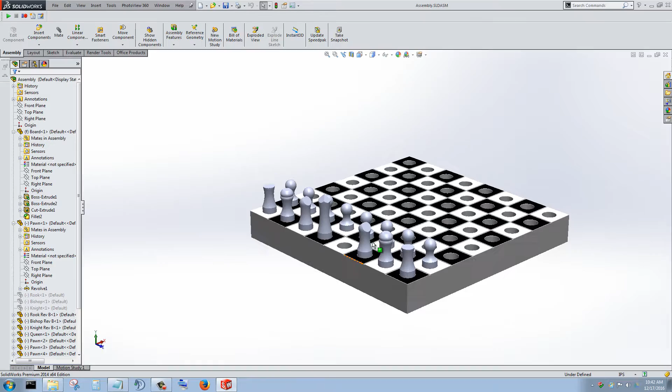Okay, I think the last thing that we need to build is the king. I just pulled up the assembly, and the assembly's nice. For instance, I can right click on any one of these parts and say open part, so assembly can be a really nice launch pad.

Okay, so if we look at this queen, we'll do file save as a copy and open, and we'll save this as the king.

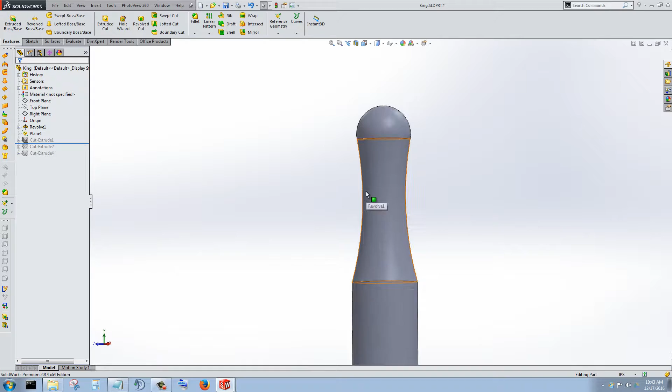Let's roll up to a point where we think - I'm just going to roll that back, and roll it back again. We could make this the starting point right here for the king, and I think we will. We'll make the king a little more staunch, so we'll edit our original sketch and adjust this arc.

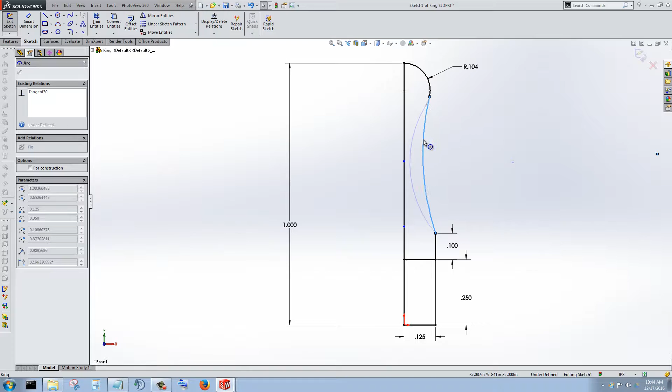And well, first - there we go. Okay, I see, there we go. Alright, that's fine.

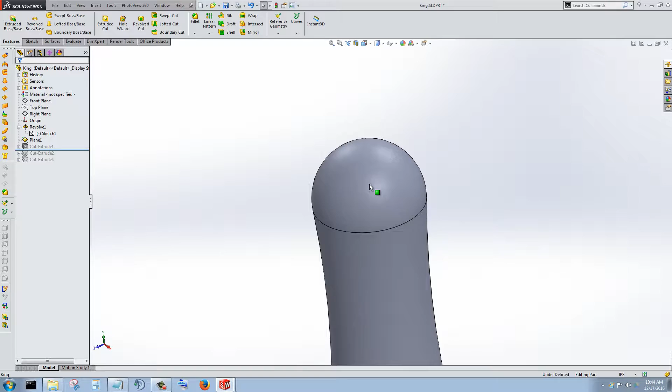Now, for the king, I'm going to do an extrude down. I'm not going to have a complicated cross, but I'll have a simplified representation of that cross. What I want to do is get a reference plane that is parallel to the top plane, so parallel to this circle right here, and tangent to the top of his head.

So a couple ways I can do that. First of all, reference geometry plane, and then your reference points. My first reference, I could select that circle right there.

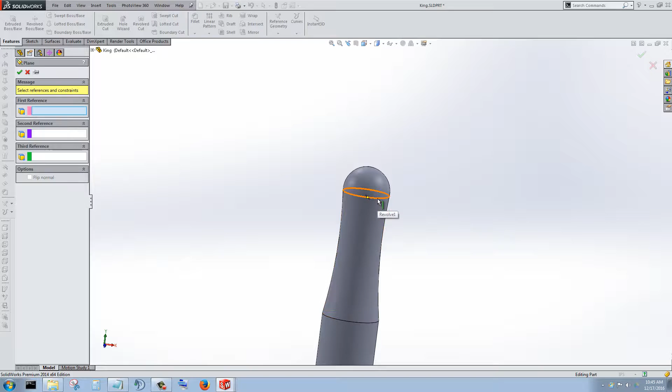Oh, hold on, I got a phone call. Wait. And okay, we're good. Alright.

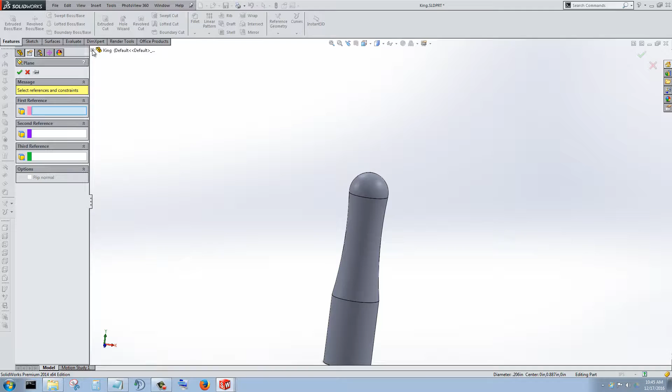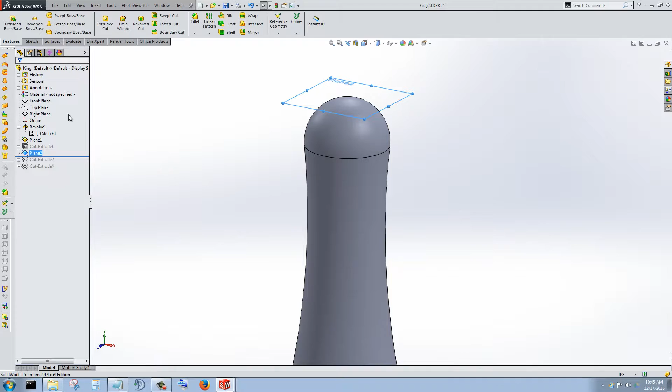Or I could just delete that, and we can also go parallel to the top plane. By default, it sets it up here at a given distance, but we can just go over to parallel and take care of that. So now it's somewhere and it's parallel to the top plane. Okay, there we go, tangent to that sphere. Check mark, OK. Let's go normal to that plane, and let's begin a sketch.

Now I'm going to carve out everything except for a square around the origin, around the very center of the sphere, or what is to be the crown. So just - there's a hundred ways to do that. Remember, back to your geometry, so I could start with a circle if I wanted to.

Oh, that's not what I wanted to do, not half an inch - there we go, 50 thou. And then I could start bringing out, go back to the line tool, not the square tool. I could start bringing out lines, enter, enter, enter.

There we go. If I hover up on that quadrant point, then it registers, and then just trim. That might be an interesting shape if I actually left it as a sphere and brought down. We can always come back and do that. For now, I have the square - that was my original intent. Let's just see what it looks like.

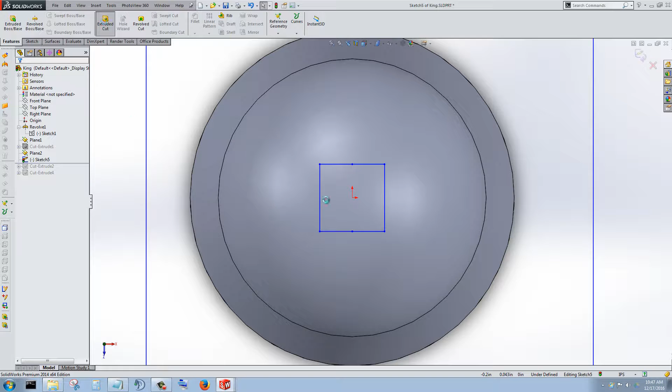So, extruded cut. Select your contours - it's going to be that contour. And our depth will go blind, although that is too far. Let's go half of that. Let's just see what it looks like. There you go, sort of kingish.

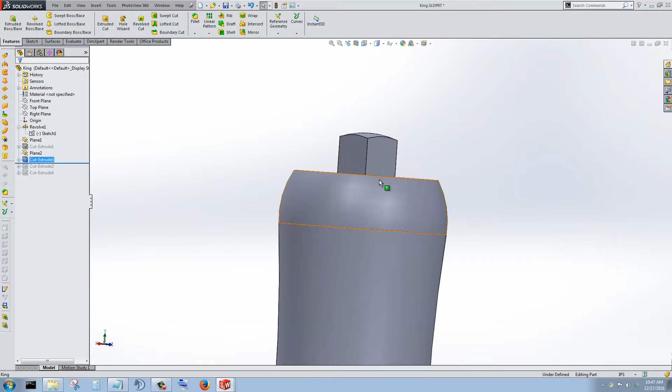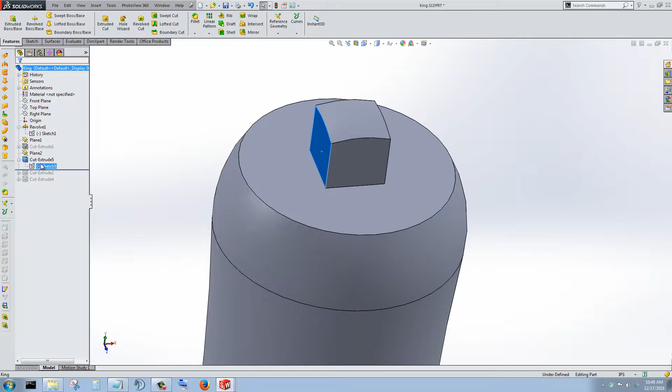Not really sure I like that. Perhaps make the square that sits on top bigger, or in fact make it more of a cross. So let's go back into the sketch. Now, to make this as a cross, I can do a couple things. Let's do this though - well, undo.

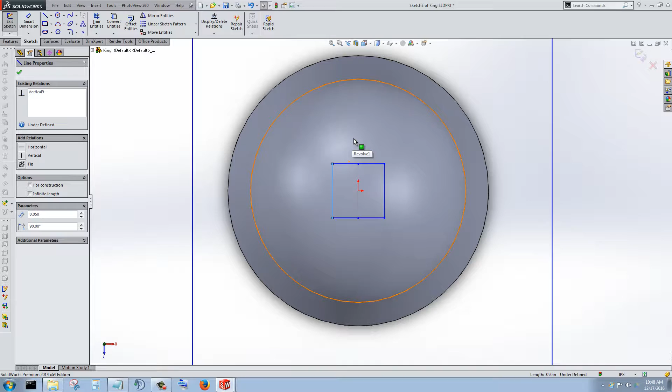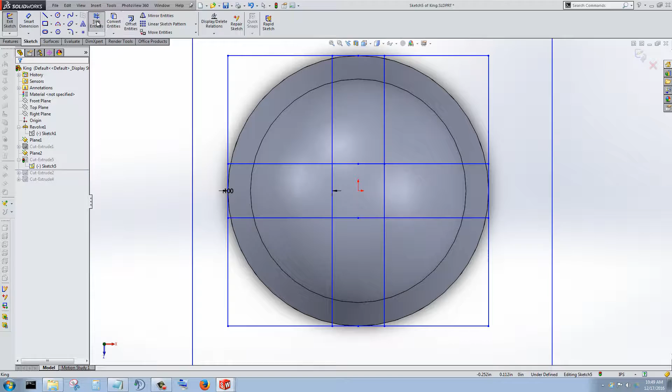Let's offset the square, check mark, and then extend the lines - that'll be the easiest thing to do. And now, trim away. Okay.

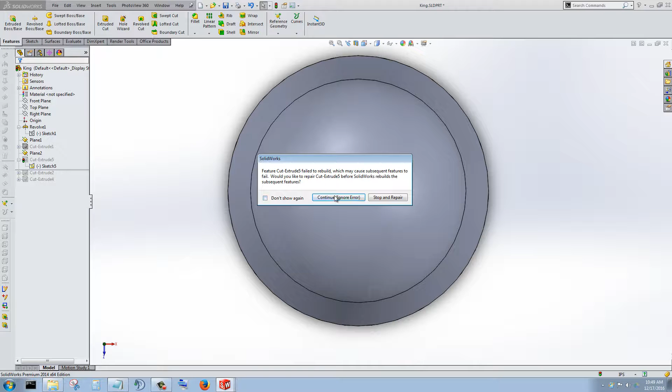Now this is going to be interesting. So I edited the sketch, and the selected contours are out of whack for the extrude cut. So it says feature cut extrude 5 failed to rebuild, which may cause subsequent features to fail. Would you like to repair cut extrude 5 before SolidWorks rebuilds the subsequent features? And I always just continue, because then it gives me an error: the intended cut does not intersect the model. Okay, oh gee, where's my cut? And it highlights in red over here with an X, and over here, and everything is red.

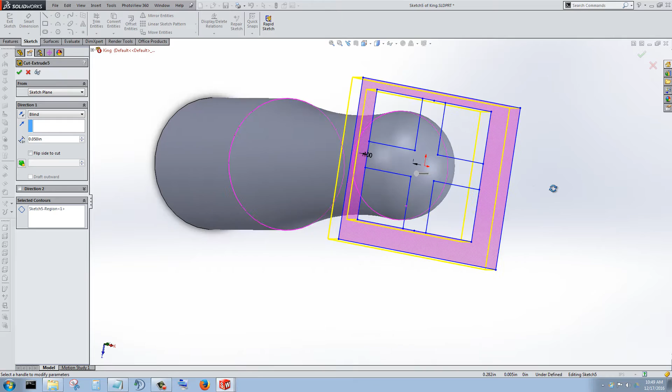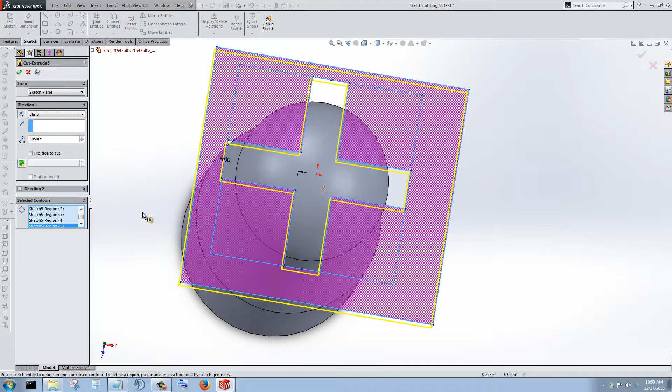That's fine, I'll just go back in and edit the feature. So what it's saying is it moved the region that I had selected - it got extended, and so right now it's not actually cutting anything, which created an error for SolidWorks. So let's just go back into the region editor, the selected contours. Now we have some geometry that will actually cut things, and hit OK. Hey, look at that.

Let's pull this into the assembly and see if that looks like a king. Sure does to me, I like that effect.

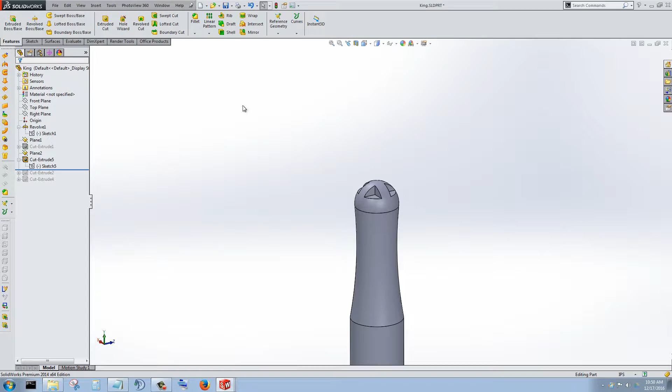Okay, save. Control tab, control tab again. Insert components - king. Mate.

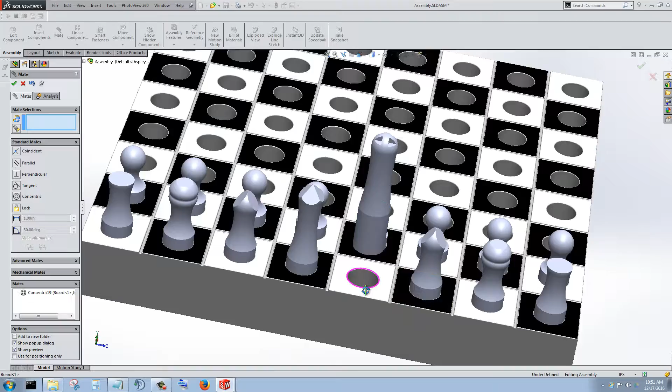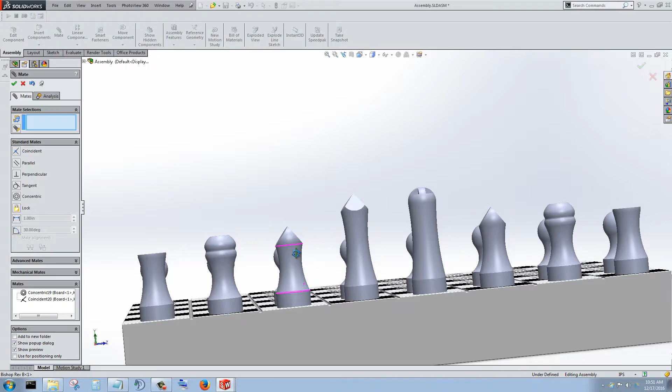Not bad, and it puts the king and queen at equal height. Survey this - the bishop could stand to be a little taller. Perhaps the top coming up to... yeah, not bad.

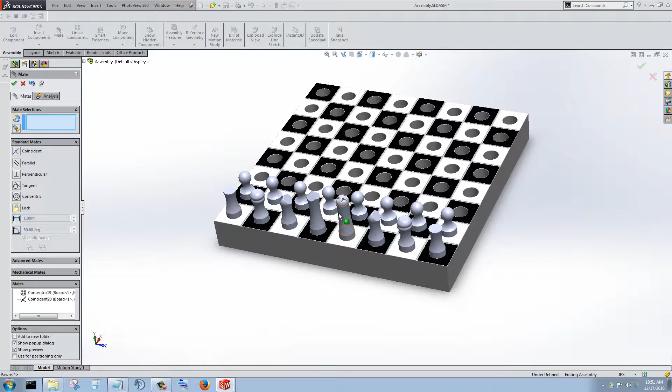Okay, let's fill out this board. Let's give all these pieces a color coding. There's a couple things we can do - we can define the color or how these pieces will look in the assembly or in the parts themselves.

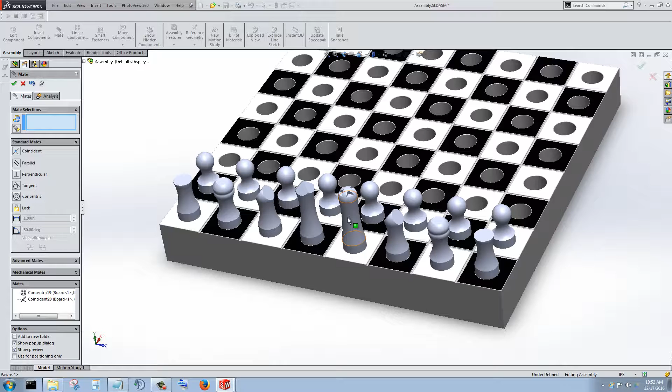In the long run, it'll behoove us to define the texture or appearance of these parts in the part files, but we're going to do it both ways. Here's how we'll do it in the assembly, and this is really simple - click on Edit Appearance.

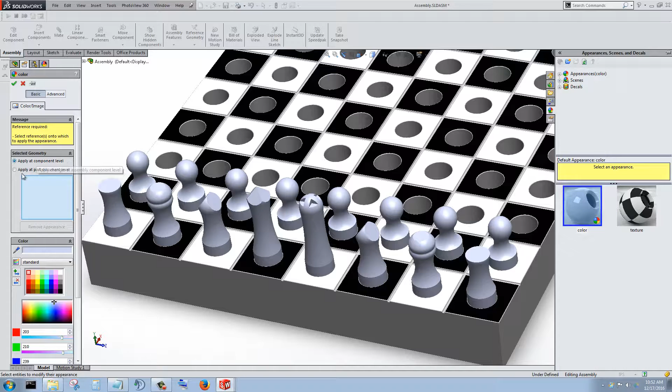Apply it at the component level or apply at the part document level. I'm not going to apply it at the part document level, because when we do that, we're going to do configurations of parts. So for now, I'm going to apply at the component level, which is the component of the assembly. And I'm not holding down shift, I'm just clicking all of these pieces.

Over here what closed was the Appearance, Scenes, and Decals tab, so I'll open that back up. SolidWorks by default has plenty of appearances that imitate different materials, different wood.

There's wood, there's plastics, a lot of plastics with different finishes, different metals, rubber, glass, then basically your basic colors as well. So I can go just white, black. Really the other thing to do is actually define the material at the part document level - if it's plastic, I really should edit the base material, and then the appearance will be inherent.

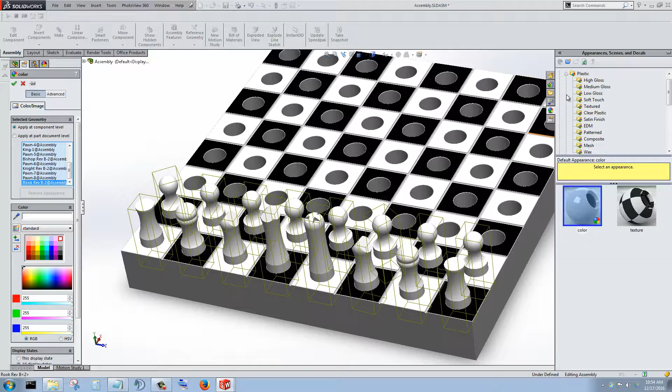For now, let's look at what a white low gloss plastic looks like, and then we'll hit OK. And you can go up to here and you can go to... oh, I have RealView Graphics on. It's going to turn on RealView Graphics, but it looks like we're okay.

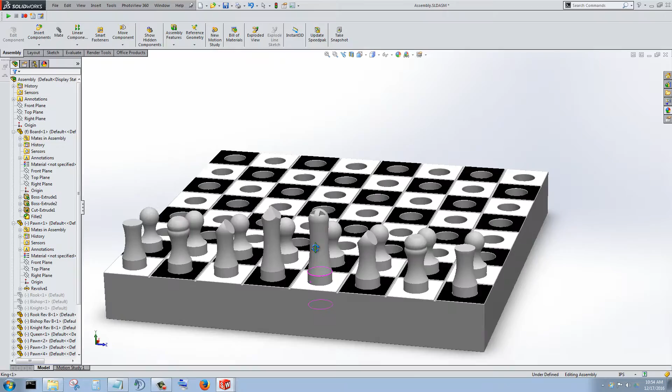What we're going to do here is just do a render, sort of a screenshot, so we'll go into our options for PhotoView 360. This is only going to be available in the professional seat of SolidWorks, not the standard seat.

Your output image size, do you want to output ambient occlusion, your final render quality, bloom, different shadow effects, direct caustics, and if you want to set up a network rendering. I've never been able to play around with that - I couldn't tell you much about network rendering.

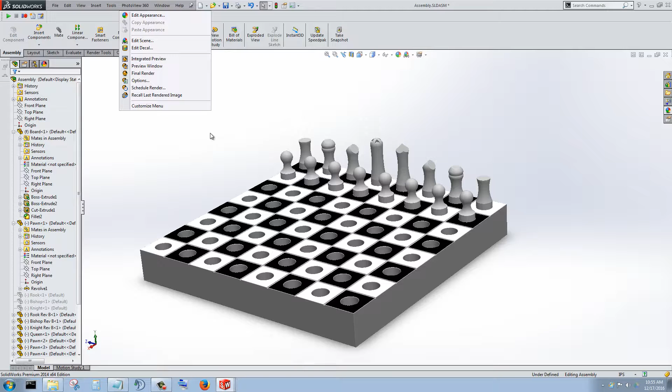But so that's just the options. Before you go in and start a render, do the preview window - another window will show up, and this is going to give you a preview of the final render and how it will appear. Oh, that looks nice.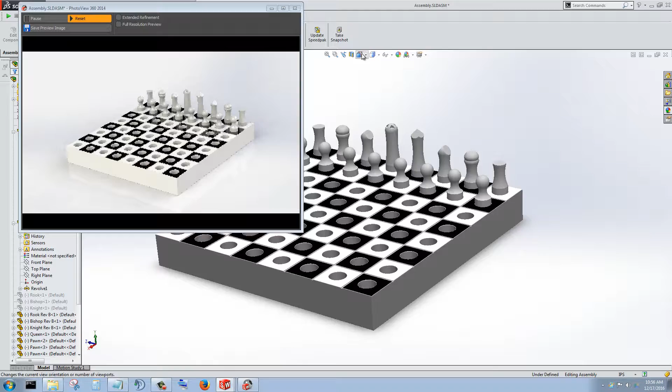And then I can pause this, or in real time I can hold down Control and move around my camera in the model space. I could also go to a standard view, and that's nice.

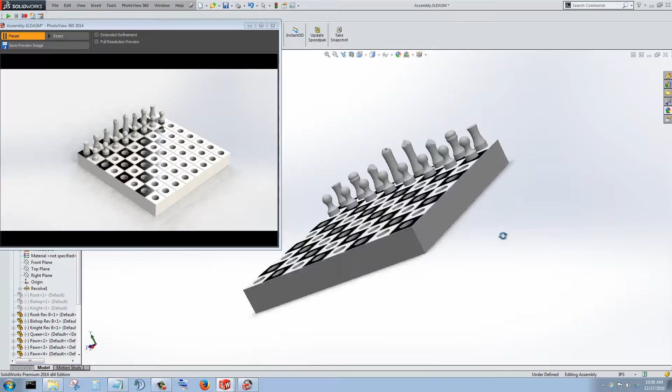So if I pause this - or actually I could leave it open and just start doing a final render, but I'll pause it. What I wanted to get to with the pause is that I can come into my model space and move around, and now my preview window isn't hogging up resources because it's paused. So we'll go back to a default view - now nothing should update it. It might update, or if I go reset it updates a little, but nothing moved.

Okay, so now let's do a final render. Let's go PhotoView 360 and final render. Then this screen will pop up and it'll start doing its passes. On a maximum quality render with the caustics, the final bloom, the ambient occlusion, it does about 6 passes, and this could take, depending on how much detail and what your materials were - if you had a lot of highly reflective materials, and what your scene was, and basically what your computer system is - this could take up to half an hour, an hour, depending on how complex your part is.

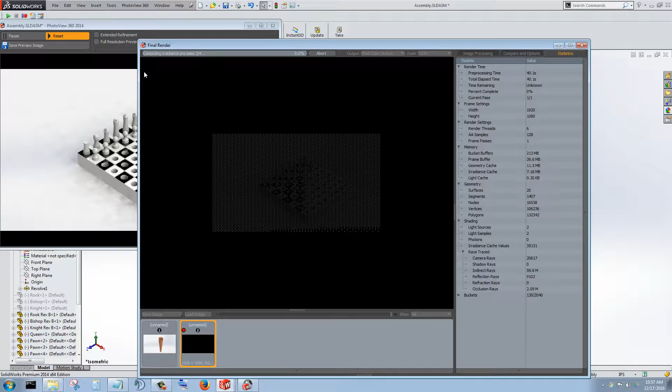We're going to let it do a few more passes. If you want to skip ahead, feel free to, but I'll let this render out just so you have an idea, and it is interesting to watch, I suppose. But I'll go get a cup of coffee, and when I come back we'll be a little bit closer to finished.

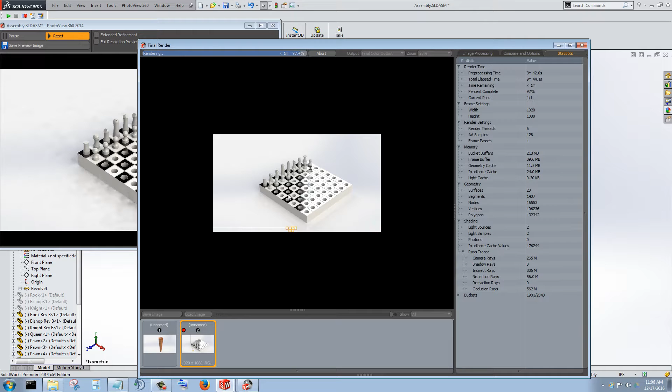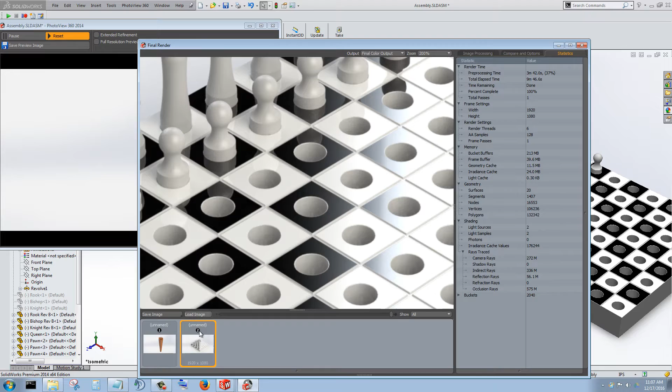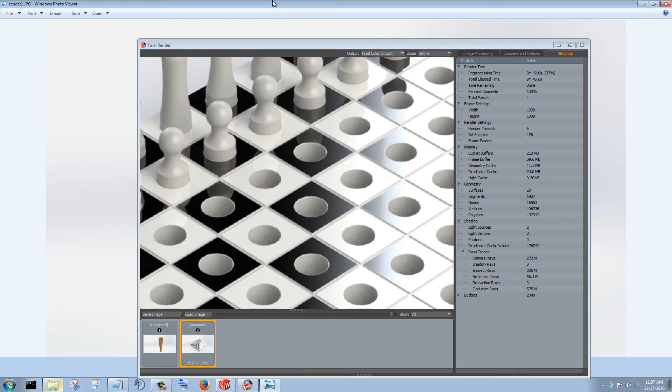Okay, alright, we're done rendering here, and it's not really... oh, there we go, I could have zoomed in that whole time. So we'll save this image, and we'll just call it render 1.

And here it was under 1920 by 1080, and that resolution can go way up. So we got some nice reflections here, a real glossy finish. The chessboard was just a default texture, and that's what you can expect - some nice subtle reflections, if it was almost a marble or ceramic surface.

And then the plastic, the medium to low gloss plastic, that's what you get. So it's fun to really play around - we'll do some shots where we make one side brass and the other side bronze, or silver and gold, or the board is wood and all the pieces are wood, or different colors of plastic. So we'll have a lot of fun with the rendering.

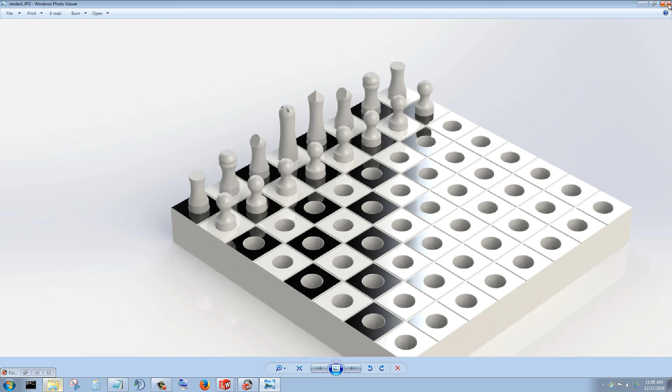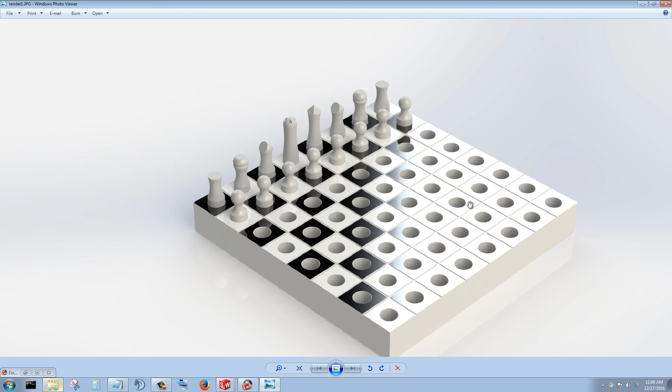For now, I'm going to call this a video, and on the next one we'll fill out the other side of the board and make sure all of our proportions with the pieces to each other, the pieces with the board spaces, everything looks good, and then we'll go from there. Thank you very much.